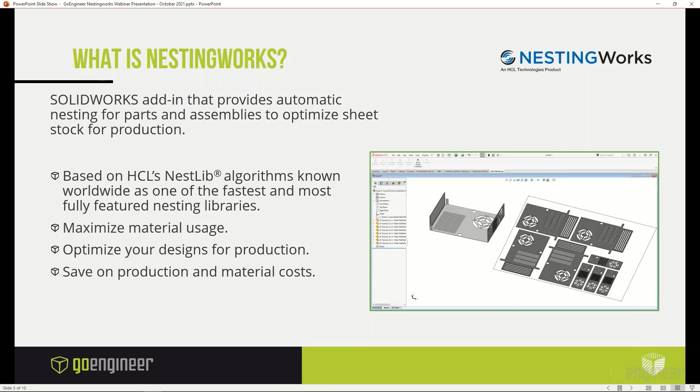A couple of the features and benefits are it does offer true shape nesting. So it's going to orient those parts. It's going to provide simple nesting. It has user-specified grain direction. Many customers are concerned about grain direction for wood. That can be specified. We have part-in-part nesting, allowing you to really maximize material usage by fitting smaller parts into open areas and cutouts. It has associativity to SOLIDWORKS as well. So when our designs change, the NestingWorks layouts will change as well. So again, saving us additional time.

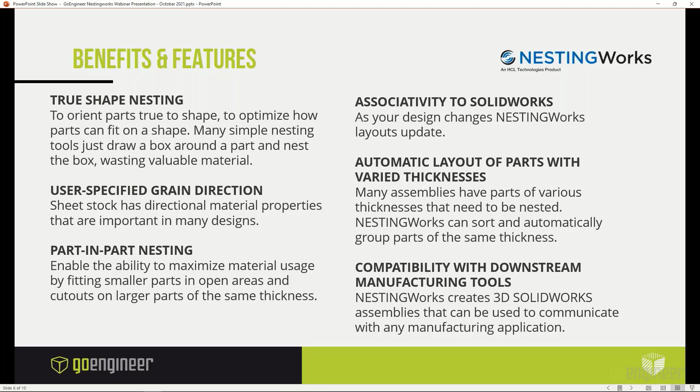We can also sort parts based on material thickness. Many customers generate designs that are multiple materials, multiple thicknesses, and NestingWorks can account for that. And then as I noted before, we do have compatibility with downstream manufacturing tools. So if you're using a different CAM solution, that's okay. You can use any CAM software downstream with this product because what we're creating with NestingWorks is a 3D SOLIDWORKS assembly. So it's very easy to work with other tools.

And now we want to go to a quick overview, and we're going to talk about the software and show a demonstration. So I'm going to have Jorge switch over to SOLIDWORKS, and we'll take a look at a live demonstration of NestingWorks. This is Jorge Ahumada. What I'm going to do is take you into the high points of NestingWorks. We were talking about compatibility downstream, compatibility upstream also. It has a lot of tools built in, a lot of technology. And it is used by a lot of people that do all of the sheet metal development in SOLIDWORKS.

And usually the very first question we get asked is, well, what if I did not do my sheet metal development in SOLIDWORKS? It will offer some tools, an intelligent unfolder that can be accessed manually for you to actually take apart, and we all know how this is.

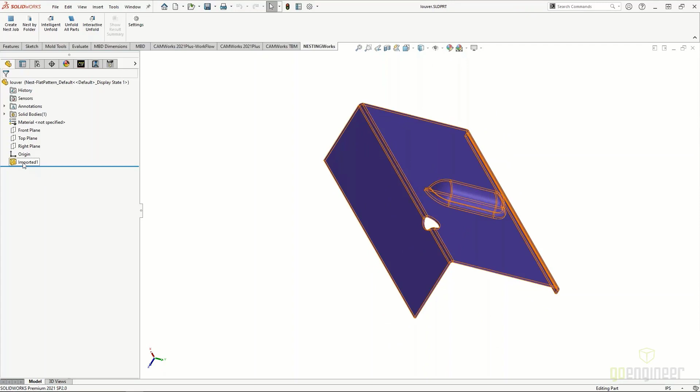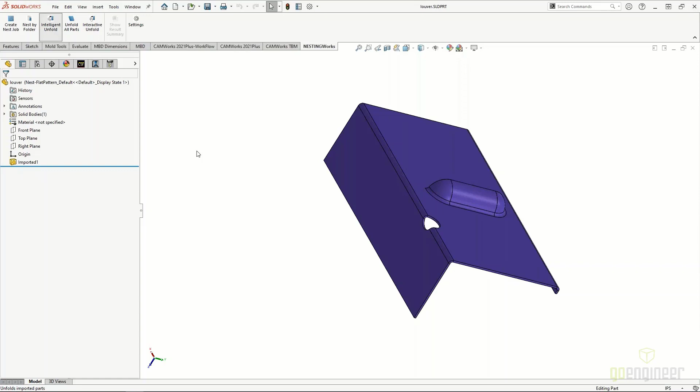All we see is an imported part, no intelligence on it. But the unfolder can actually work with it as long as the bends are there. And of course, we have to tell it. On this part, you could do interactive. In the vast majority, you can just go with the automatic, where we say, take a look at this, figure out what everything is so I don't have to pick the faces.

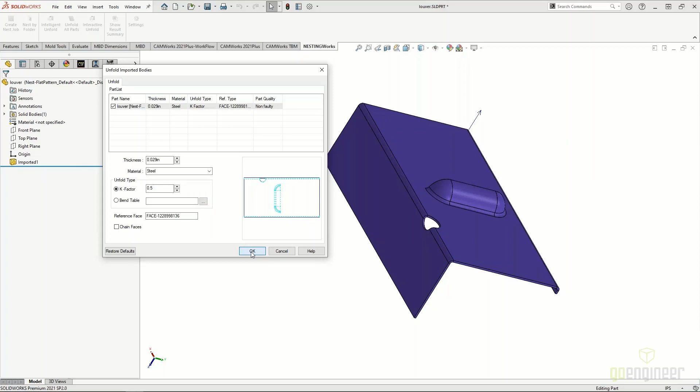And we tell it how we're going to do this. Are you using a K-factor? Are you using a bend table? And if you have your own bend table already developed, this button would allow you to do it. And this is what it does. When you accept that, it makes the reverse calculation, fills out any punch or formed areas, and it gives you what will be the true blank that you would have to cut to make that part.

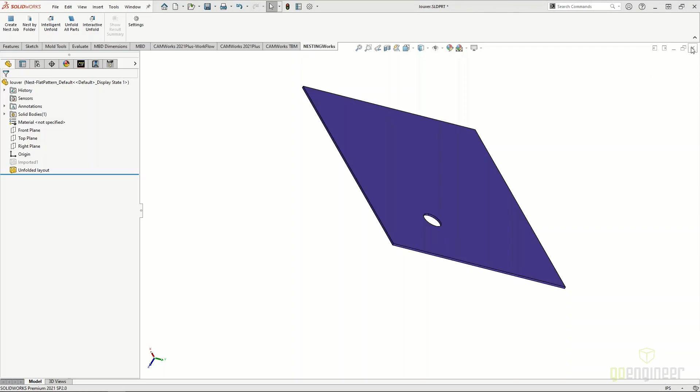So we can also keep this and use this as a tool for imported parts, because sometimes we get the entire set of parts from a customer that might be working in a different system or doesn't send the complete set of data that we might want. It's okay, we can deal with that. Now, with that said, we can now take a look at how this operates.

It can operate either by grabbing an assembly, or it can operate if we put all of the parts that we want to nest in a folder. And if there is an assembly where all of these parts get put together with hardware, nuts, bolts, it's okay, because it will discard in this first mode of operation the assemblies in there. We don't even have to bring the parts. We can just go straight to the nesting and nest by folder.

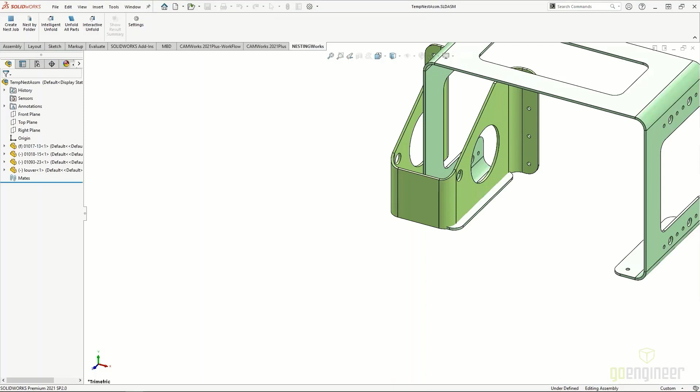What folder do you want to do? We just navigate our disk and we point it to the folder where we might have those parts. It will read all parts that are sitting there. It will access the sheet metal data if it exists on it. And it's going to stop and say, look, it has already done the unfolding, but you have this part that does not have any bend data. What do I do? Do you want me to run the unfold?

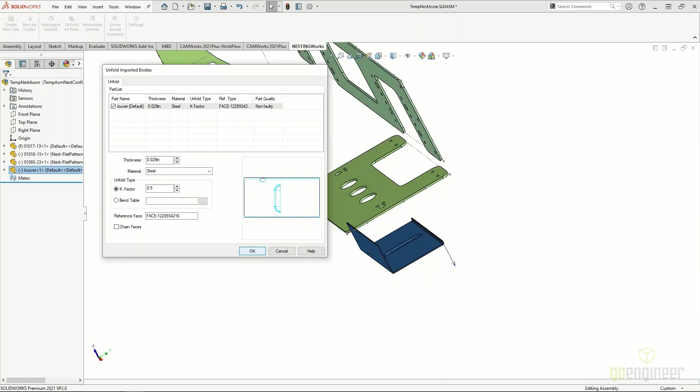And this window that you see here was invoked automatically by the system. It is the capability that you can access on your own if you want to reverse engineer the part. So all we have to do in here is go OK. So if you look at the picture, it's going to say, oh, that's a flat part. Here's the set of parts that you have. How many of those do you need? I would like to have 2 sets, and it alters every single one of those, and you can control it manually.

It is a job-based nester. It is designed to do it on an as-needed basis as the requirements change, which in some operations change by the hour. So it needs to know, as a job-based nester, what parts are you doing? How many of these do you want? It needs to know what is the material that we have here.

And we have a library, user customizable, that contains what the system calls standards, but we can also give it custom DXF files of irregular remnants from the past, sketches inside a part or an assembly. So we will just give it one of these. So you have a total of 5, use however you want. It does have a sheet forecaster. If we present it with a whole bunch of them, it can actually look around and decide which one will be the best.

We have part data, we have sheet data. It does have the option to deal with multi-head routers if you have them. And here in the options, we just tell the system the basic parameters of keep a 1/4 of an inch between parts, do the fast nesting. We can also generate remnants as sketches, and we can also tell it what type of shape: true shape, square shape, minimum, whatever. And that's really all you need for the nester to do its work.

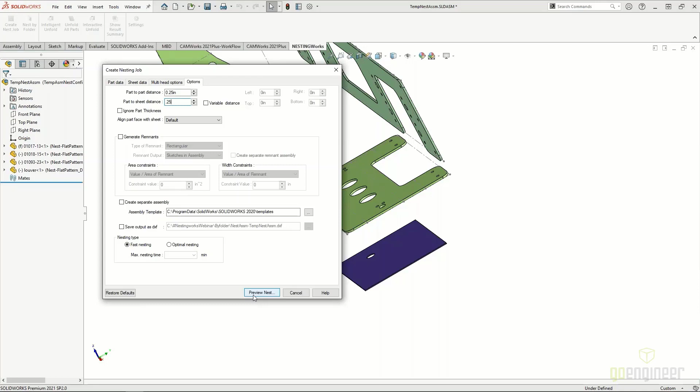Once you go in here and you say, let's go ahead and nest that, it goes, whoa, whoa, whoa. Here is a problem. You do not have sheet stock for this part. Why is that? Because it also separates by thickness, and somebody designed this part as a different thickness than what it needs to be. It will separate by material, by thickness, and allow us to control it that way.

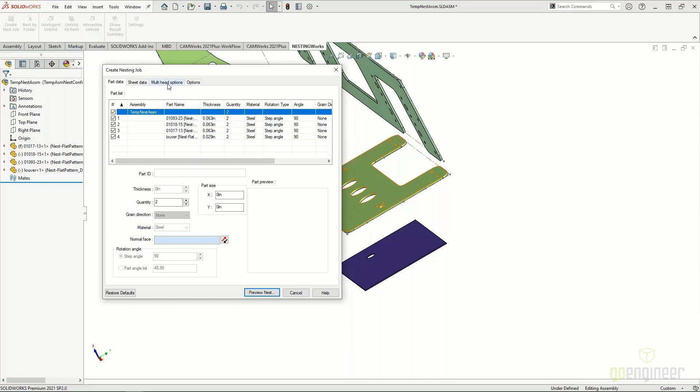Or we can go in here and tell the system, don't worry about it. Put everything on the same. So then it goes and it just throws it in the thing, however many we let it do.

However we see fit. All of the control is here to automate this. A lot of these controls can be saved. So you can go back and take a look at the part and go, well, this one is going to have a protective polyethylene film. I would like to have the other way. You just flip the part 180 in the nest. I change my mind, I would like to have 5 sets.

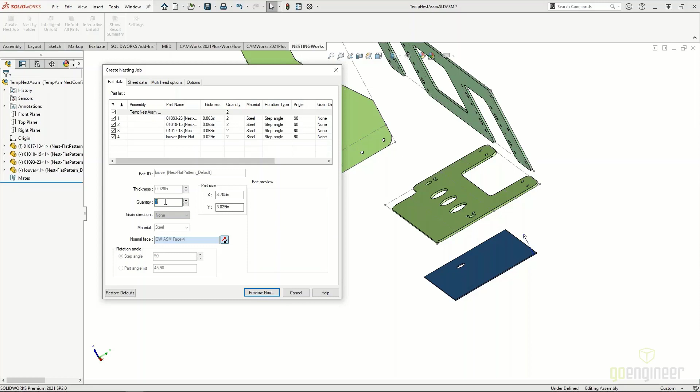Same process, new nesting. And if this is all you're doing with the nesting, this is really all you have to do, because from here, you can tell the system, look, just write me a DXF, I'll put it on a memory stick, take it to the machine, and the machine can take it from there.

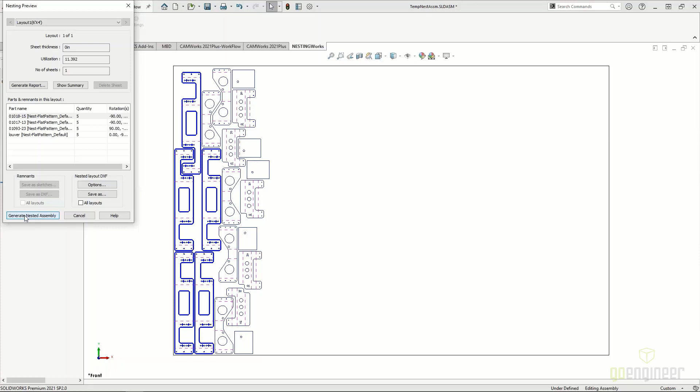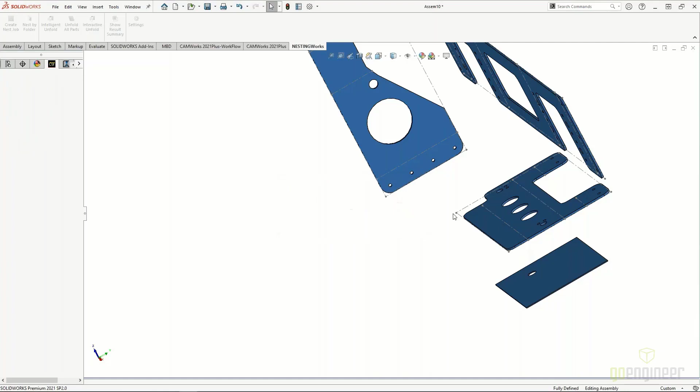If you do want to use some of the CAM tools that are integrated like CAMWorks, you can tell it, get me an assembly of this, and it will put it into an assembly. It will ask you if you want all of these parts to be known to CAMWorks to be machined automatically. And at this point, you just went the extra step to tell it, I'm going to go to the machining side. It will give you a quick report.

What did you ask? How many we did? What is your current overall utilization if you're going to do this on this sheet? And that's really all this is. This needs to do the work. You just have to specify the parts. You just have to specify the stock that you're going to be using, amounts, degrees of freedom, and it can then do the complete nesting, even if it is irregular shapes.

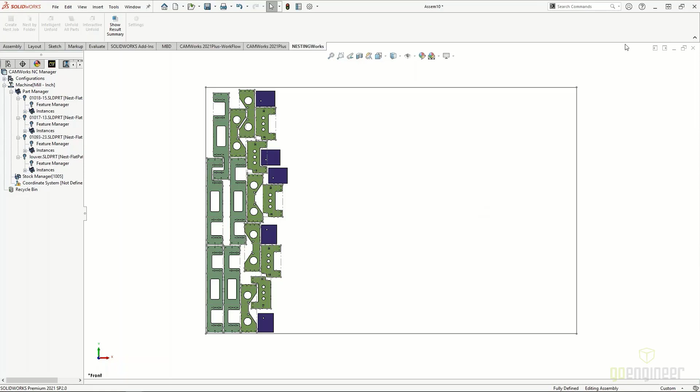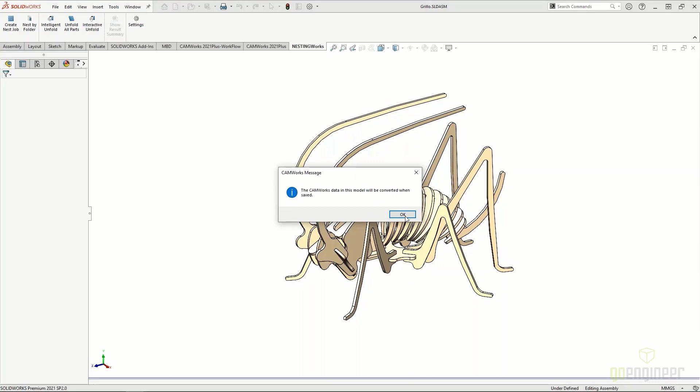We had said we can also start out of an assembly. So you might have something like this, where you might take a look at it and say, yes, I need to cut this out of some material, make it like a kit, because this is what gets packaged for sale out there. So you have all of the components sitting here, have the whole assembly, process is the same. Whether you start with everything in one folder or in an assembly, you can just let the system know,

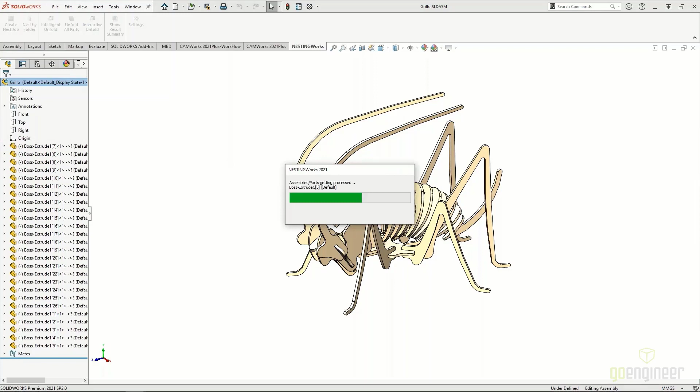grab all parts, isolates, checks marks, puts them on the list, and then it launches the user interface. How many of these do you need? I just need one. They are done out of 3mm plywood. You probably have seen this in the stores. What is my raw material? You're not limited to just what you have defined previously. You can tell the system this is a custom, and it has a 300 by 300 millimeter. It's about 12 inches.

We work on both. And what spacing do you want between those, whether it is on every edge or whether you just say put this to the edge. That's all is needed. Once you tell the system, go ahead, let's do this, it runs through the same thing. Given the complexity of these parts and given all of the degrees of freedom we give it, it is going to take a little bit longer to go through it. You will see the screen flashing a couple of times. And once it has come up with it, it will just present it.

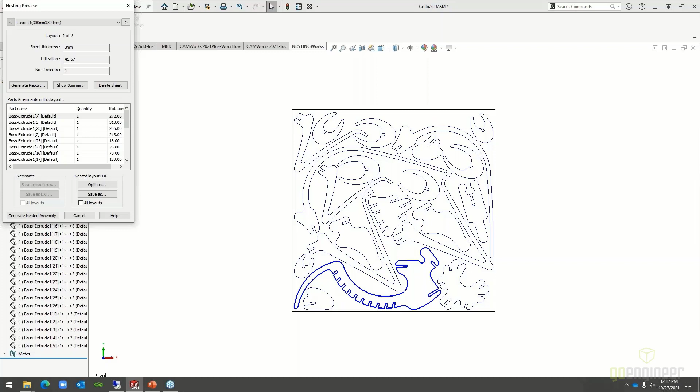And if you are doing very complex parts, with most of your splines, if you can simplify them, that would help. So it goes through and it goes in the material you give me to make the kit. It looks like this. And you're pretty much done with that. So whether you're doing your basic wood or sheet metal, the process is the same.

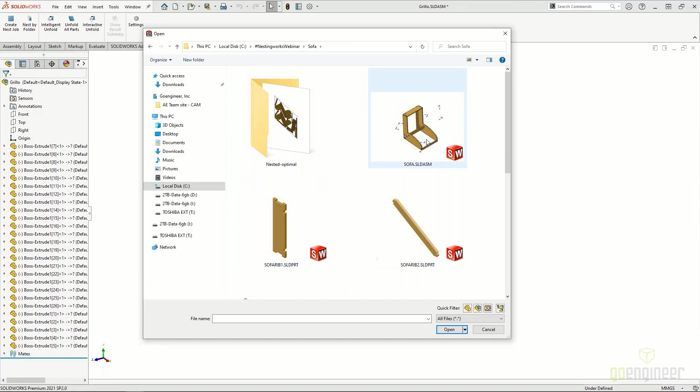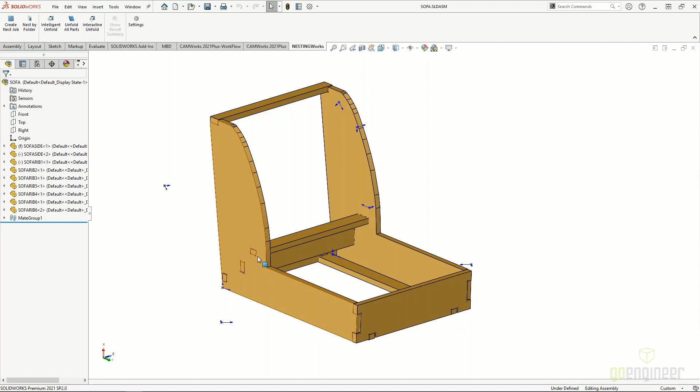You could have things like something that we can relate a little bit better. We have a sofa frame. It can be something that is completely parametric with a lot of configurations. It's really not a big deal. And the reason it is called true shape is that it is going to keep the shape of the part complete with the dog bones, because you have to cut those.

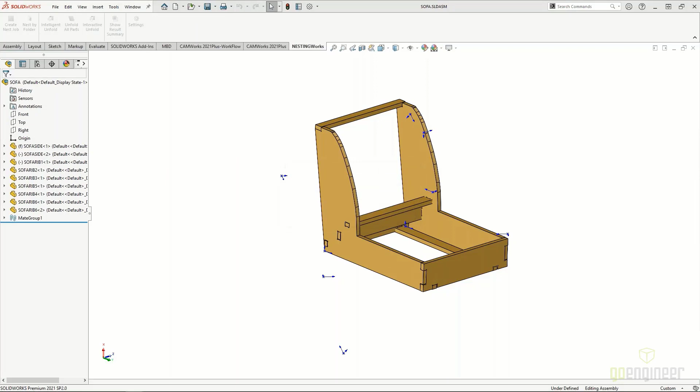So we're going to create the nest job. We're going to tell it, here are your parts. And this part, because a lot of the work was done in the context of the assembly and some of the parts were already designed at an angle, it will show them at an angle. And depending on the step angles that we have in here, depending on how many times we want to try to rotate the part to do this, it can go through and pretty much

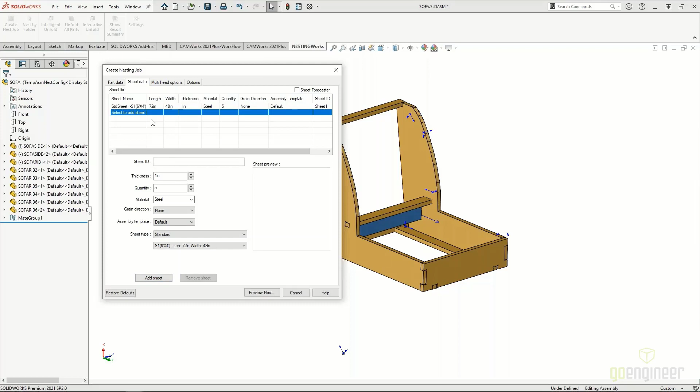just give it a material. If the material is already present, it will tell you. You don't want to add it as a duplicate, we already have it. We'll do 1/2 inch, we'll do 1/4 to the edge. We don't need to generate remnants. And we do the fast nesting.

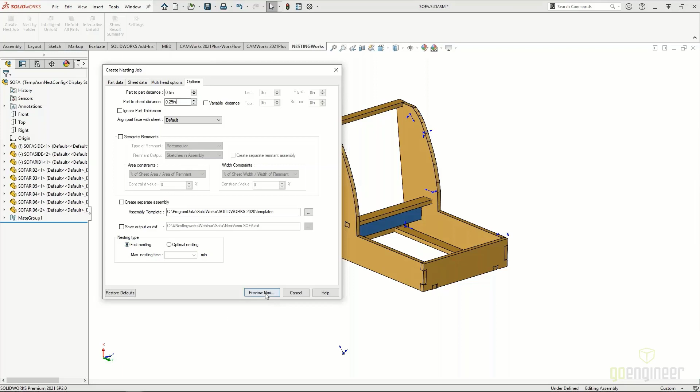So it does its work and now it's pretty much done, however many you ask it to do. It is possible for the nester also to work with an assembly that contains assembly in assembly. It will just drill down to all of those. So it is very basic. A lot of the interaction becomes second nature, and it will get you pretty fast to the point where you can do something as complex as this in a few minutes.

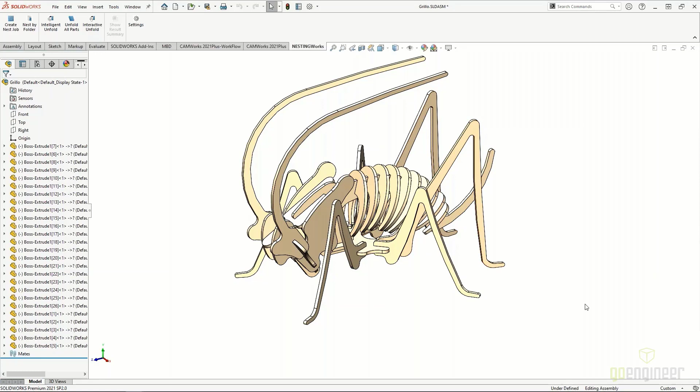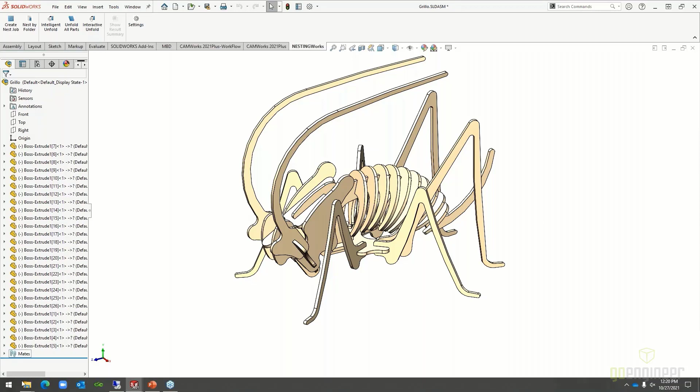Now we do offer the training and we will take you through all of the other controls based on what your needs are. And as we said before, if you do have questions, write them in the interface of the webinar, and we will answer them after this.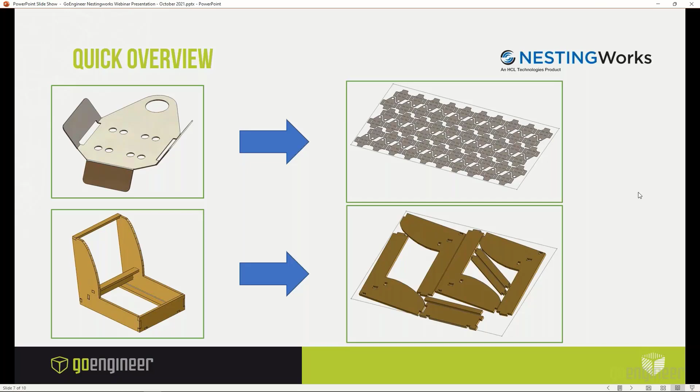Well, thank you, Jorge. That was a good overview of the software. We just want to touch on a few of the capabilities and advantages of NestingWorks. With NestingWorks, we can increase material optimization as much as 60%. We can improve our utilization of materials, reducing scrap and waste. We're definitely increasing productivity because we're not doing this manually. Nesting these parts manually would be hours of work. So as you guys saw, the automation piece is very fast. And because it's tied with SOLIDWORKS, if there are design changes, that automation piece is also going to save us time, because when the design changes, our nesting layouts are going to update. So it makes it very easy to do this production and to streamline things.

There were a couple of questions. First question, Jorge, is can it nest parts inside of cutouts of larger parts automatically? And yes, that's what we refer to as part-in-part nesting. So it is capable of doing that to further optimize material usage.

The next question is, if we're using a laser, does NestingWorks have the ability to add tabs or micro joints to prevent those parts from falling off the sheet? Are those tabs positions customizable? Do you want to address that question, Jorge? It is not going to add automatically the tabs, the micro joints, the shaker joints, the shaker tabs, whatever terminology you want to use. If you do pass the information to CamWorks, a heavily customized post-processor can drive a laser, and the contour milling operations of CamWorks will have the options of tabbing the part. That will be a capability of the CAM system. It will not do it at this level.